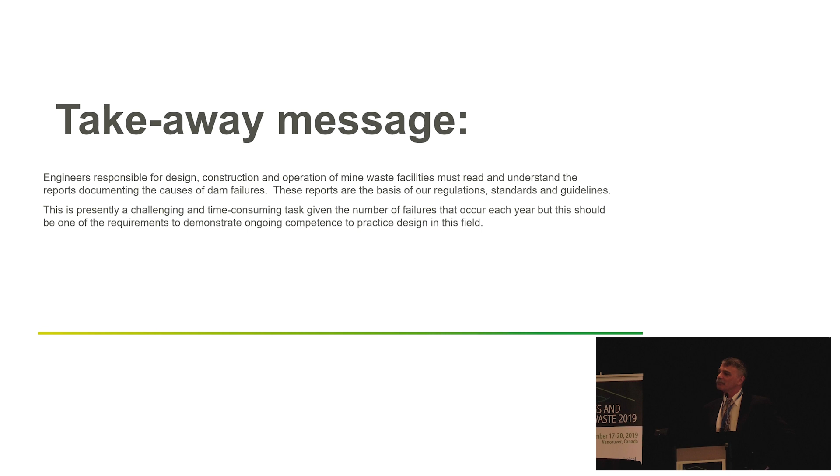And so the takeaway message, you can stop listening to this after this, is read. There's all these tremendous reports that we have available that you can learn from. They explain how these failures occurred, why these failures occurred, which are different answers. And personally, I believe that in order to be competent, to be able to practice in the field, we should have read these reports, we should have understood the reports, and we should be able to design our facilities to prevent the failures that are occurring.

We've got a draft standard on Friday, so I'm going to talk about requirement 13.4: identify and implement lessons from internal incident investigations and relevant external accident reports, paying particular attention to human and organizational factors. So this talk goes directly to that requirement in the global standard.

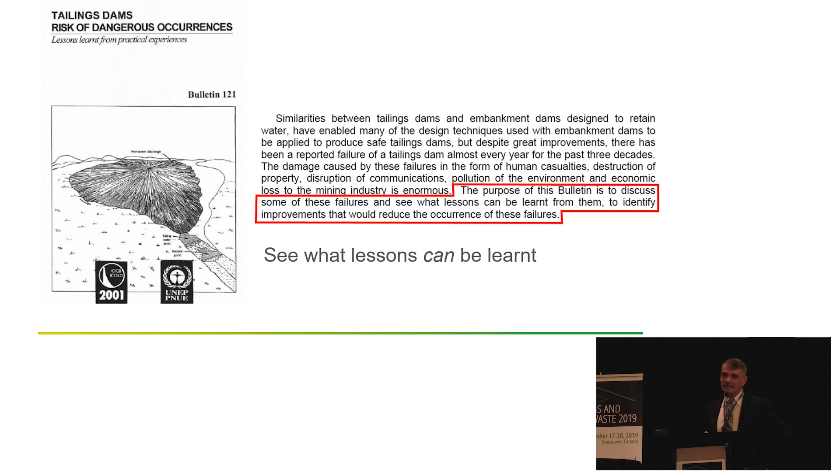This isn't something new that we're talking about. If we go back to the ICOLD Bulletin 121, published in 2001, there's a statement there, but the key is see what lessons can be learned. Even though this document was titled Lessons Learned, it's see what lessons can be learned, and you need to read these things to understand the lessons.

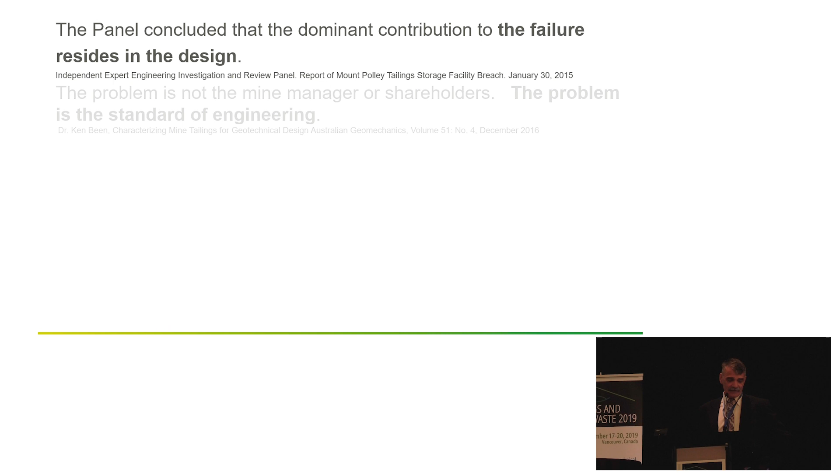And one of the things when you start reading consecutive failure reports, you come up with a disturbing and recurring theme. It's that the failure resides in the design, the problem is the standard of the engineering, inherent vulnerabilities in the spillway designs, deficiencies in the engineering practice. Those are things we engineers can address. We can't address some societal issues, but we can improve the quality of our engineering.

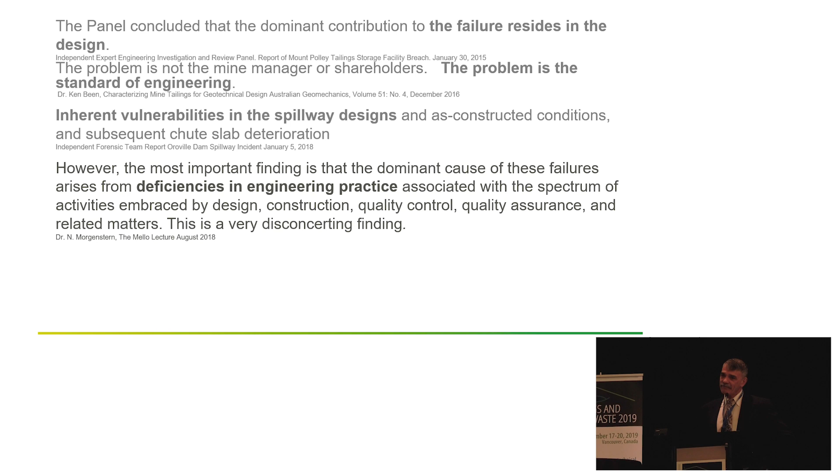Failures are continuing to occur. I think it's because we have better reporting that we're seeing a higher failure rate. It's not that more dams are failing, it's just that we now know the number of dams that are failing. So we can no longer hide. The failures are out there, everybody's talking about them, we need to do something about them.

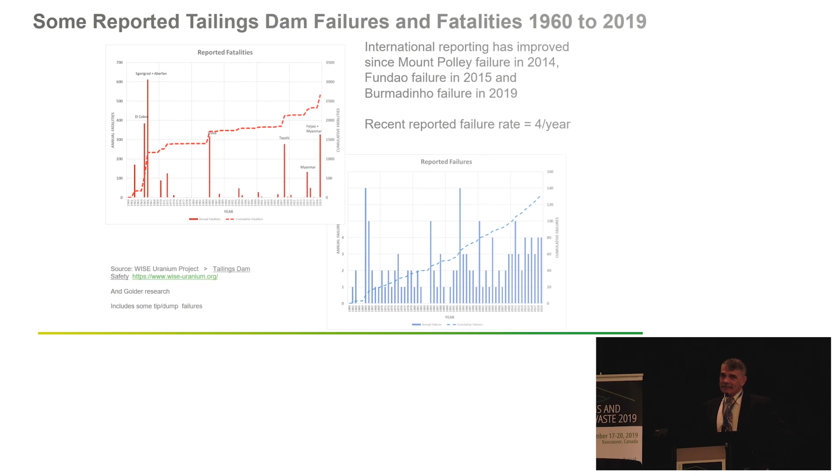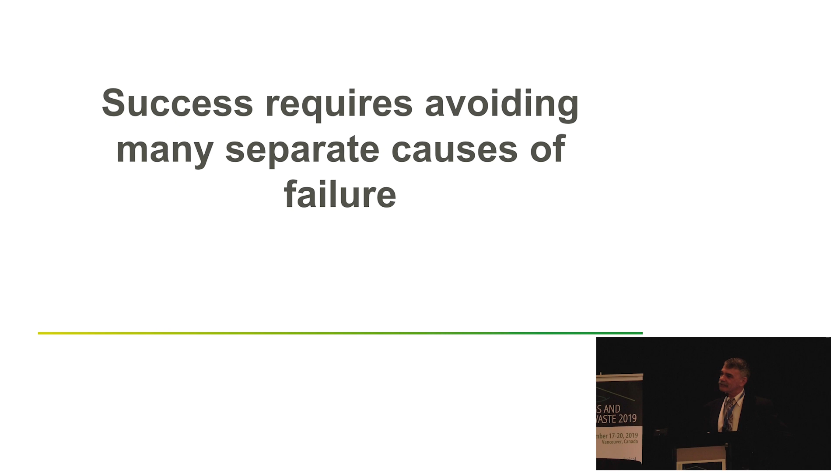And this saying, you know, I was reading a book on evolutionary biology. It's the success of species. So success requires avoiding many separate causes of failure. We're engineers, we have to identify each and every possible cause of failure for our tailings dams and provide design controls, multiple design controls for each of those failures if we're going to succeed. If we miss one, we have a failure, but we have to catch them all.

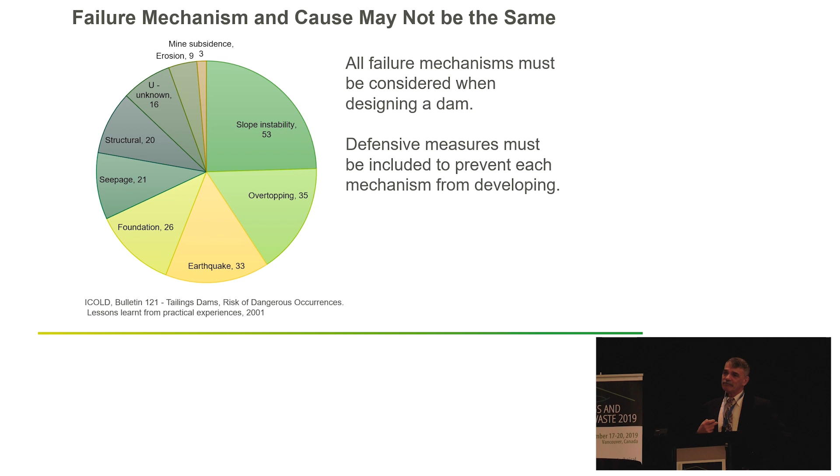And failure mechanisms and causes are not the same thing. This is ICOLD Bulletin 121. It's the statistics what people like to play with, the causes, the mechanisms of failure. And so I'm a geotechnical engineer, I have to provide a defensive mechanism for each and every one of those failure mechanisms.

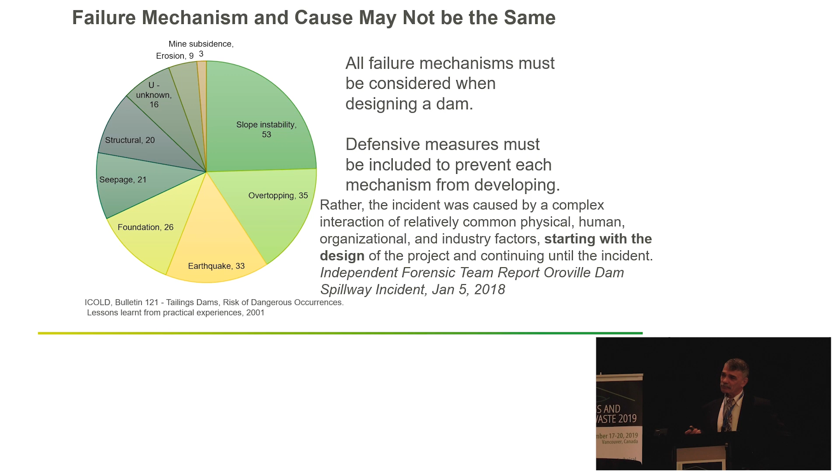However, when you read some of these reports, the incident was caused by a complex interaction of relatively common physical, human, organizational, industry factors, starting with the design. So we, the engineers, have to understand what all those complex factors are so that our design accommodates those. So we don't just have to accommodate the physics of the problem, we have to accommodate the cultural issues related to the specific problem that we're dealing with.

A good friend of mine, J.T. Thomas, was a driller. We'd be standing out in the mud and he'd say, good judgment comes from bad experience, so you should be happy you're having this experience because you'll get better judgment. If we reforecast that for tailings engineers, good engineering judgment comes from understanding the lessons available from existing bad experience. You don't want your own bad experience, you should learn from the existing bad experience. So where do we find it?

The lessons to be learned are found in reports of forensic investigations and inquiries. I've put a couple questions down there you should be thinking about when reading these. What decisions would I, the engineer, make if faced with the same situation and information? This is where you really learn how to do decision making. And you have to avoid hindsight - knowing it failed, so not making that decision. Not knowing it failed, what would you do?

And another one for engineers of record - this is the important one. At what point would I, the engineer of record, stop operations at the facility so that investigations and design modifications could be carried out to rectify observed performance issues? That's the key one. If you're an engineer of record, you have to be prepared to do that. You have to be prepared to stand up and say, stop. You can no longer do this. We have to fix it.

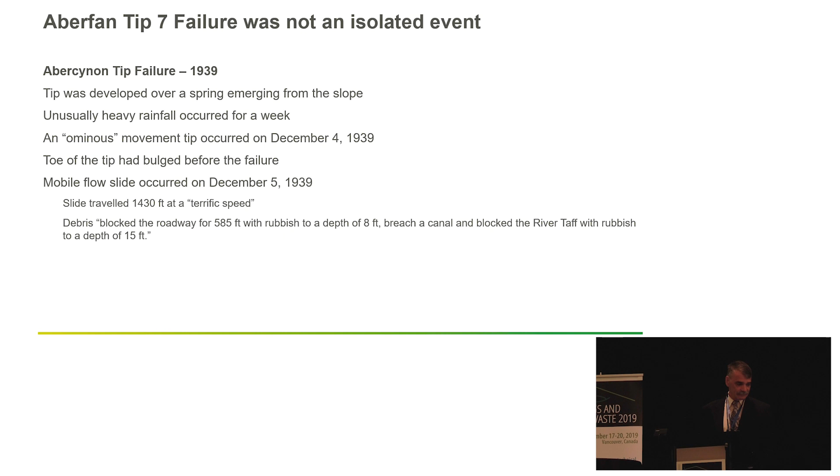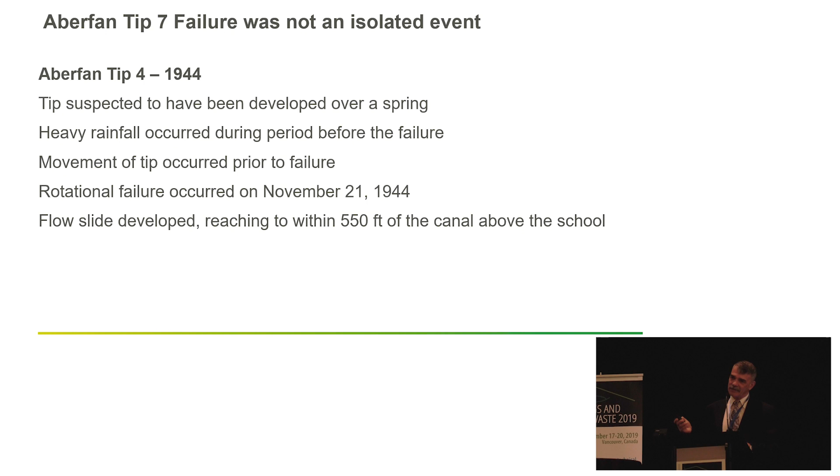In 1944, at the same site - not just an adjacent site, on this site - there was this flow slide failure. Different tip, same site. You've got to be internalizing this, knowing this, and working forward on your designs to prevent these things. Now on the same tip, in 1963, they had a failure - a mobile flow slide resulting from it, stopping just above the school. That was the site of the 144 fatalities.

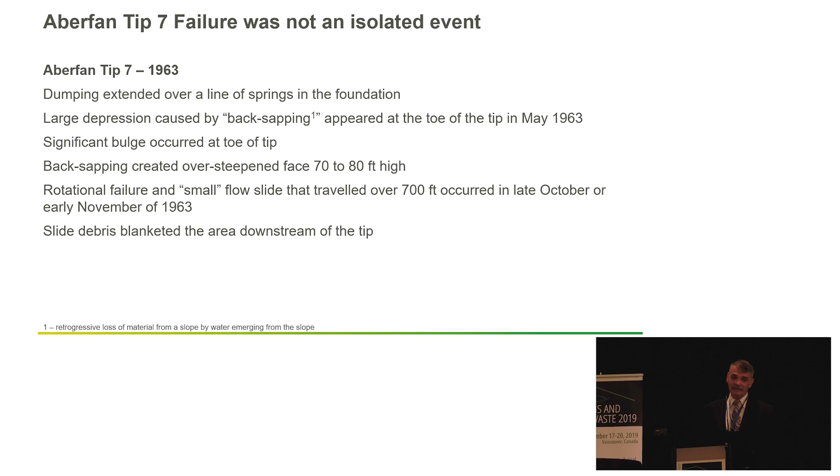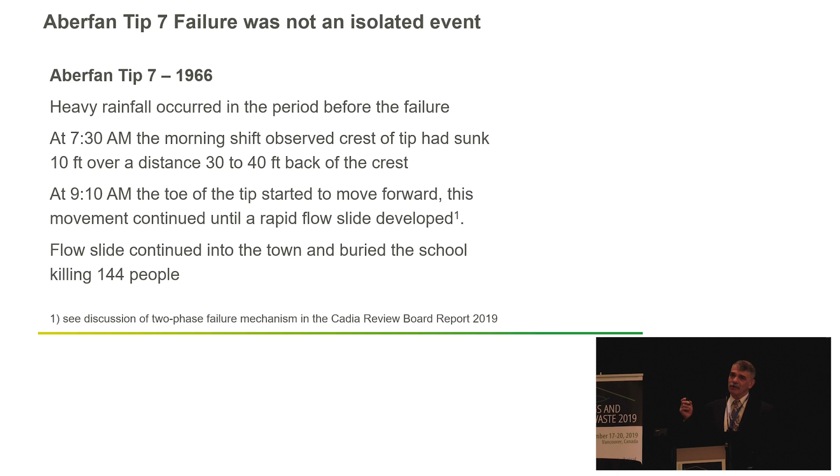So we were accumulating this experience and nobody's listening. Then we have the event in 1966 that resulted in all the fatalities. All that happened was it ran a little further than the previous four incidents that had occurred. So we need to learn from these type of things. Very good report to read.

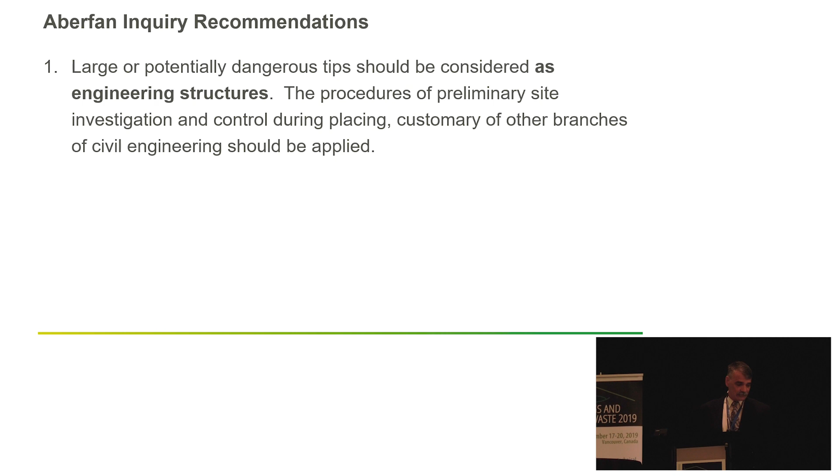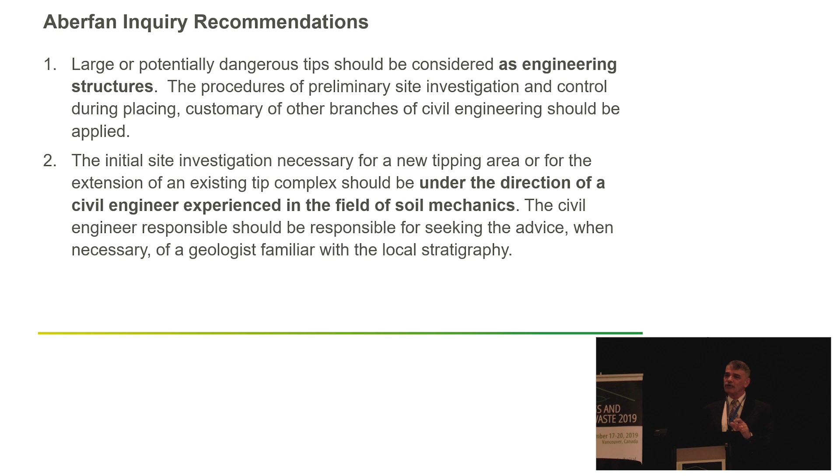So some of the recommendations - I'm going to repeat these later - you should consider the structures we're building as engineering structures. You should use civil engineering principles. You should have a civil engineer experienced in soil mechanics. He should talk to the geologist. You should use qualified, competent engineers. You should have an inspection periodically by an independent and qualified engineer, and he should do that on an annual basis.

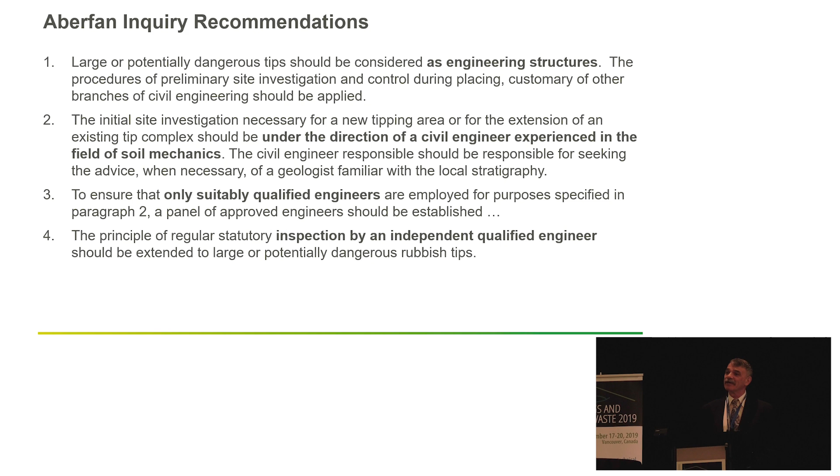This is 1967 that we're getting this set of recommendations, and if you read later ones, they're the same. So what have we learned as an industry? The standards which should be called for in large tips adjacent to inhabited properties should be set, and we have to decide if we want lower standards for sites with lower consequences. The definition of a large or potentially dangerous tip for statutory purposes - that sounds like CDA dam classification, dam consequence classifications.

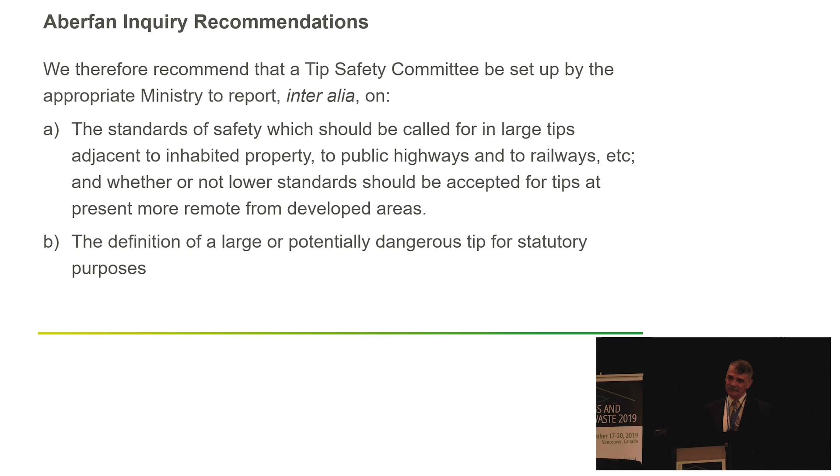Aberfan sent a message to the geotechnical and mining industries about the importance of collecting data on and learning from previous events. The message remains current. That's the 1967 statement - the message remains current, and in 2019 it's the same message. They highlighted the need for proper understanding of the hydrology and hydrogeology of tip sites, and of the materials upon which the tip is constructed, as well as proper management of the tips themselves. So over 50 years ago we're being told certain things, and we need to learn these.

So let's just jump ahead. There's a whole set of failures that occurred between 1966 and 2014. I tried to compile a lot of those, but it doesn't fit into a talk of this length. So, a tailings dam failure with no fatalities - still a wake-up call for the industry, though.

Here's a report, so you can go and get it. The key is there are a lot of appendices, and when you read the reports, you need to read the appendices, because a lot of what you'll learn is in your interpretation of the information provided there.

So there's the independent expert engineering panel report, then the Chief Inspector of Mines put out his report, with an appendix being the Klohn Crippen Berger report on the assessment of failure mechanism. So you've got multiple reports to read and understand the Mount Polley situation.

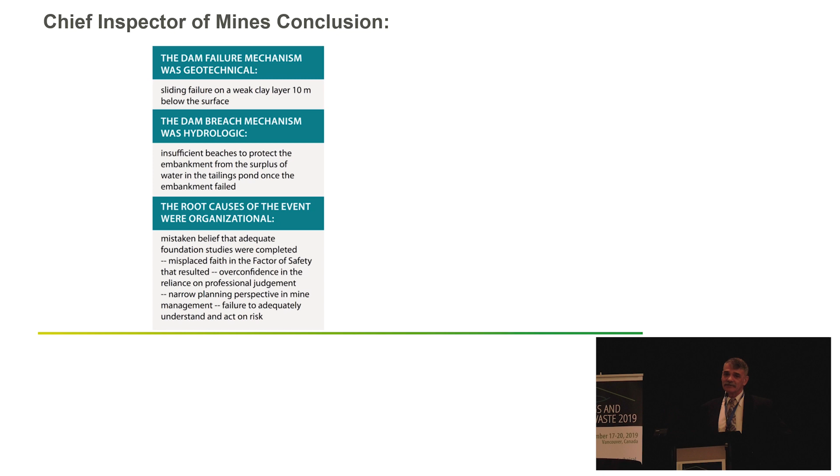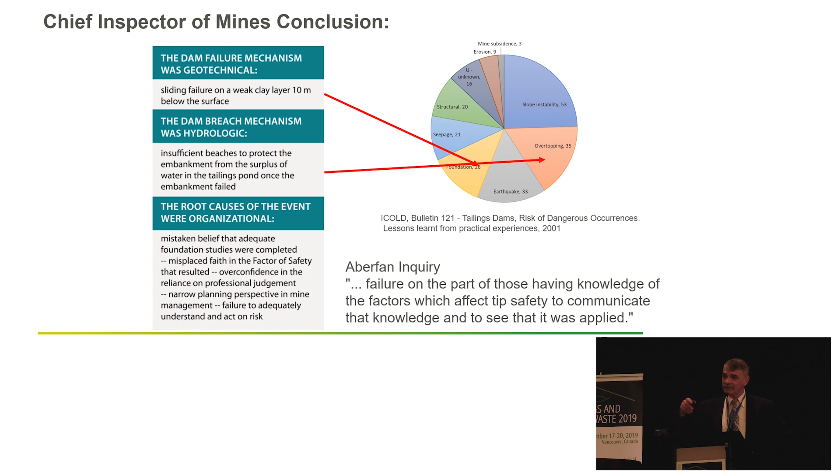So if we look at ICOLD and see where this falls, the failure mechanism was foundation, and overtopping was the breach mechanism. But if you read that last box, related to the Aberfan inquiry, it says: failure on the part of those having knowledge of the factors which affect tip safety to communicate that knowledge and see that it was applied. So there's a direct correlation from 1966 to 2014.

Some other conclusions of the report panel: the panel concluded that the dominant contribution to the failure resides in the design. There are other pieces, but basically that's the key — we have to work on the design if we're going to improve the performance of our structures. I'm an engineer, I can affect design. I'm an engineer, I can't affect society. So I'm focusing on the design part, I'm talking to the engineers.

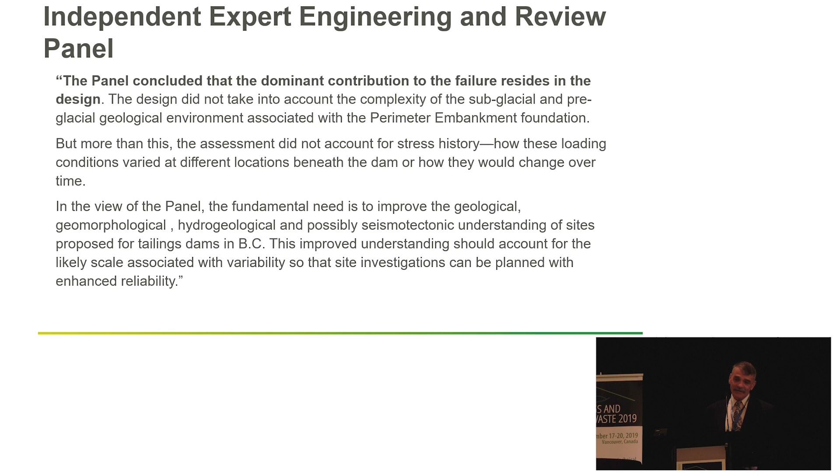So you have to go back, get Ralph Peck's paper from 1969, and read it. There are 8 short things you need to do to properly incorporate the observational method, and one of those is to decide that it's appropriate, because there are many exclusions to using it properly.

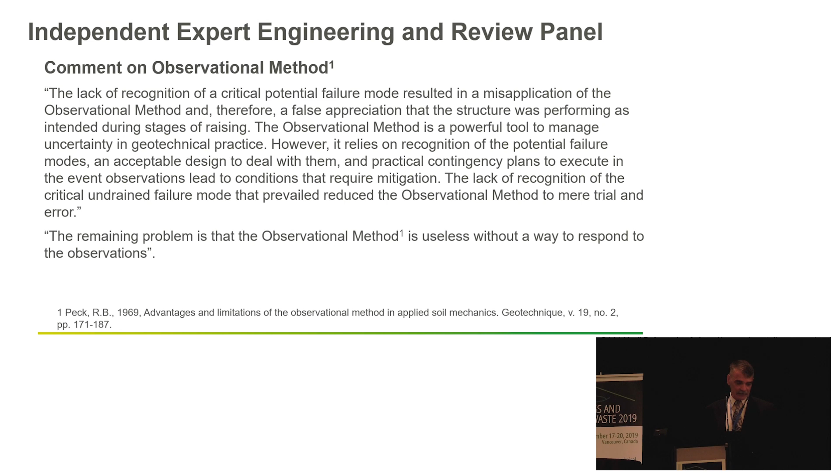From that same report, review boards — so review boards are what's going to prevent the tailings dams from falling down. Well, it's part of best practice, that's all we're saying, it's part of best practice. But if you read to the end of it, they should not be necessary for all tailings undertakings. So the industry has to decide where they can best apply the very short pool of independent reviewers.

To reduce the consequences for the tailings industry, all facilities don't need the panels that you've been talking about and listening to on their projects. There's just not enough — you know, if we needed $3 billion worth of engineer of record work, and if you have 3 people on a panel and you do the multiplication, it's a bigger number.

Within BC, in the mining code, it says the Independent Tailings Review Board provides non-binding advice and recommendations, but does not direct the work or perform the role of the engineer of record. The review board can't take over the design. The authority for design has to be vested with the engineer, and the responsibility for operation has to remain with the owner. So it's very important to understand that when you're looking at what you expect to come out from a review board.

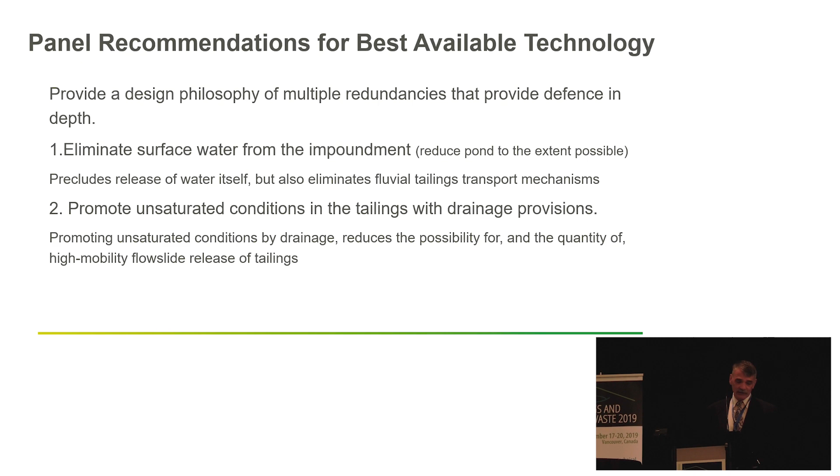They had what at the time were thought to be controversial recommendations for best available technology. Really, if you look at it, it's design philosophy to provide redundant controls on the failure mechanisms — that's what they were saying. Number 1, eliminate surface water from the impoundment, or reduce it as much as practical, to reduce the consequence of failure. Promote unsaturated conditions in tailings with drainage provisions, and achieve dilatant conditions throughout the tailings deposit by compaction. Very simple.

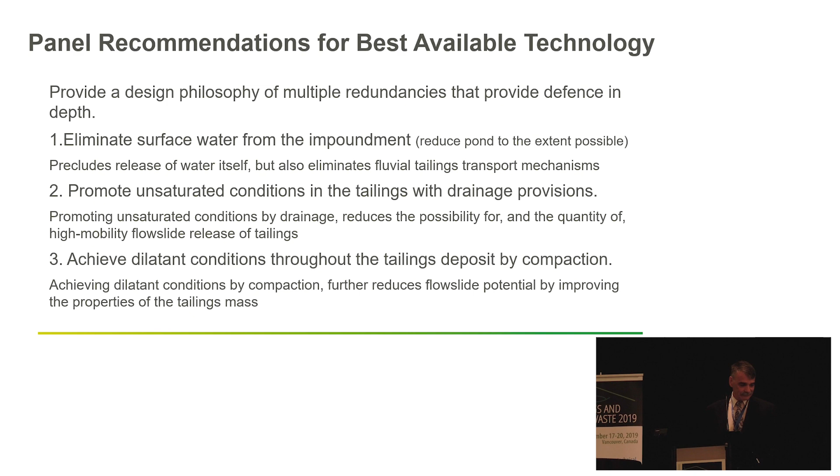You look at what they're really telling you to do and you can incorporate it on many facilities. However, it's not new, providing unsaturated conditions.

Tailings Bulletin 97, ICOLD, published in 1994, goes straight to the core of how do we successfully implement drainage. If you look at it, it says upstream dams no longer need to be regarded as a type that traditionally has a low factor of safety if you implement drainage. So you can go and grab this document and read about what people were thinking about in 1994.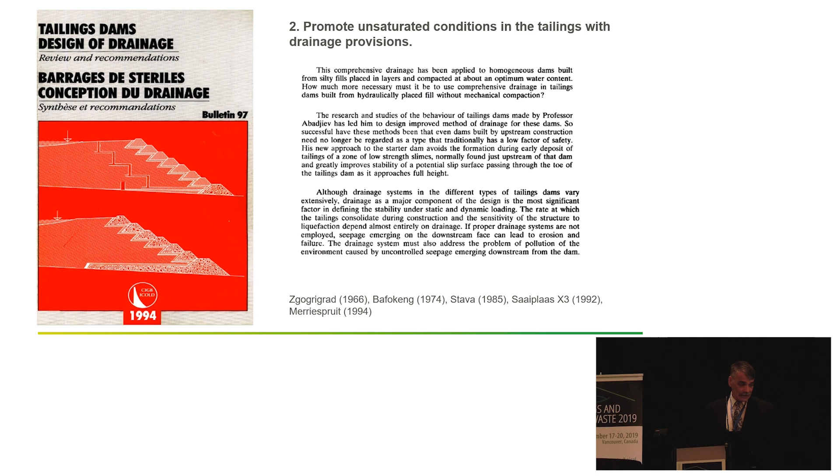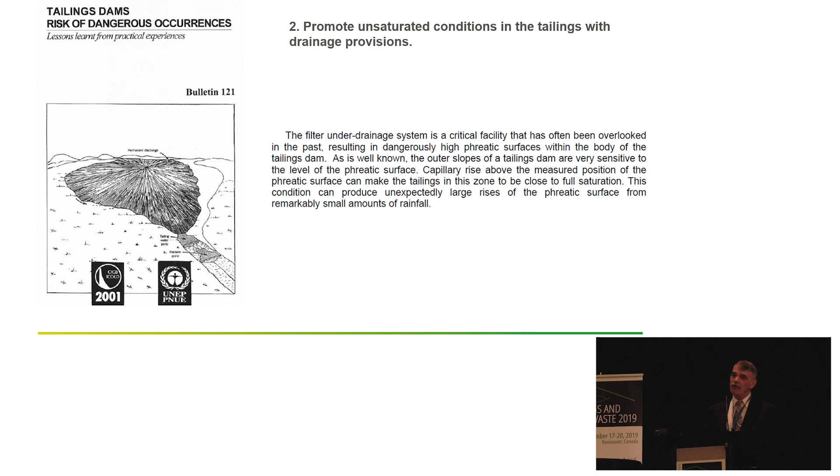To improve the stability of upstream constructed tailings dams, ICOLD Bulletin 121 promotes unsaturated conditions. The filter and underdrainage system is a critical facility that has been overlooked in the past. So we're getting multiple times that we could have learned this lesson. It's about time we did.

Aberfan to Mount Polley, what changed? Here are the recommendations following Aberfan. Just threw them up there again, those five. First one, design under direction of the engineer of record.

That's coming out of Mount Polley. Operation under direction of a tailings qualified person. So you have to have people who understand the structures you're using.

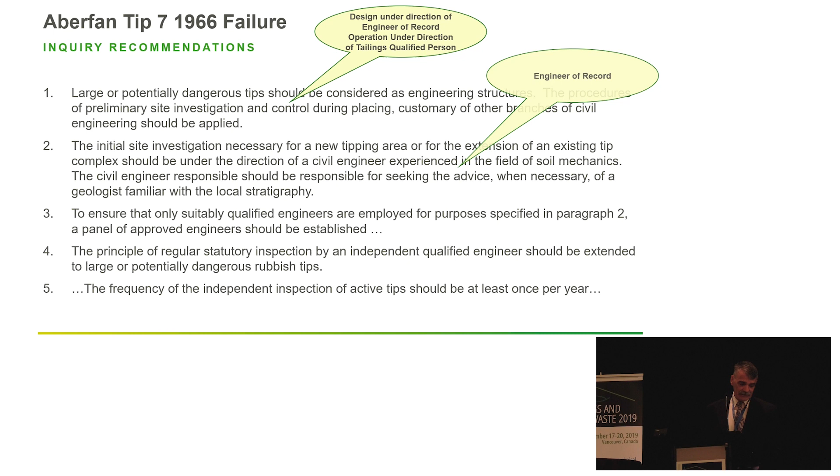Direction of a civil engineer, that's the engineer of record. He has to talk to geologists, that's BC's foundation characterization guideline. Qualified engineers, chief inspector of mines recommended competency, professional reliance standards.

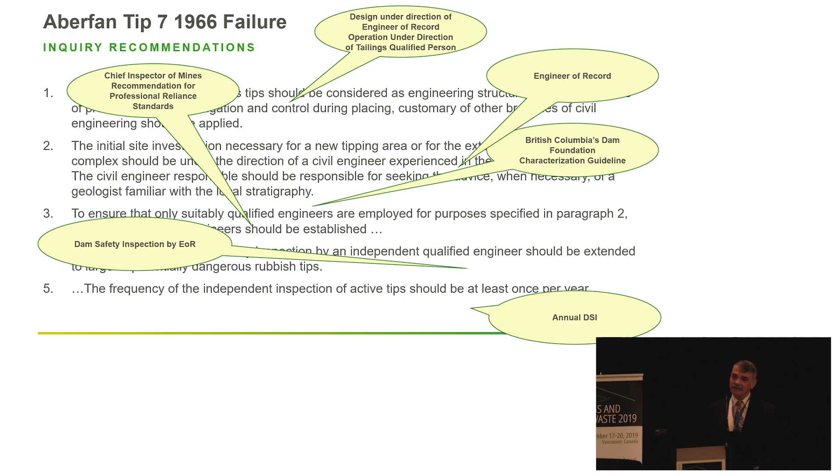Dam safety inspections by the engineer of record on an annual basis, same thing, just different words. We go on to the next recommendations.

You have to have standards. Here we have the Canadian Dam Association Dam Safety Guidelines, and then we have the consequence classification. So you can see that we haven't really moved forward from 1966 to 2014. We've implemented some of the things, but we're still having dam failures.

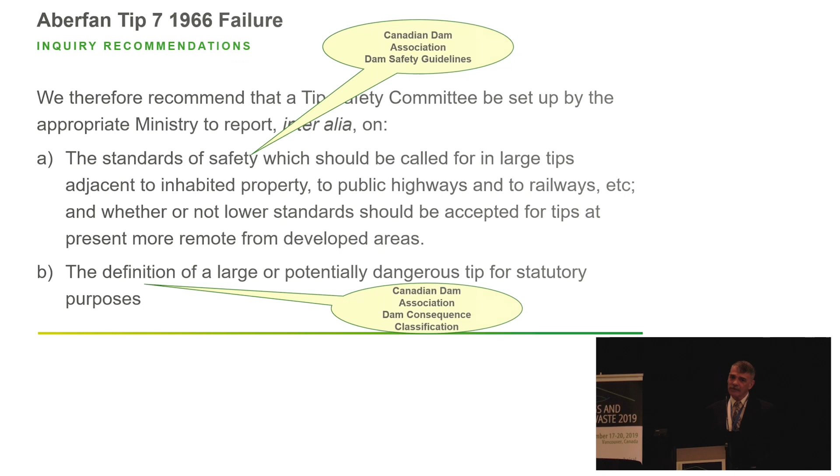We get to 2015, Mount Polley. Questions to contemplate when you're working through the report and all the appendices: what decisions would I, the engineer, make if faced with the same evolving situation and information?

It's not like this dam was performing perfectly and then it failed. At what point would I recommend stopping use of this facility to investigate decisions and develop a plan for remediation and return to operation?

There's a report, and the best part of the information is in the appendices. You have to read those appendices. It takes more than a weekend, but it's well worth doing.

Additional reading: you need to go and get Steve Vick's paper, GeoRisk 2017, 'From Deviance to Diligence.' It's really a good paper to read. It talks about engineering structures, it talks about NASA, it talks about some of the organizational issues that lead to failures of tailings facilities. Good paper, so that's a paired reading assignment.

So this is my interpretation, a design concept based on the successful operation of the Germano Dam. Starter dam with a basal drain, slimes contained behind an upstream raised dam constructed of sand tailings to be fully drained, fines elevation below the sand so that you get no slimes within your sand, runoff from the upstream catchment diverted around the structure and under through the culverts. So they're using some of the best practices or technologies that were stated from Mount Polley.

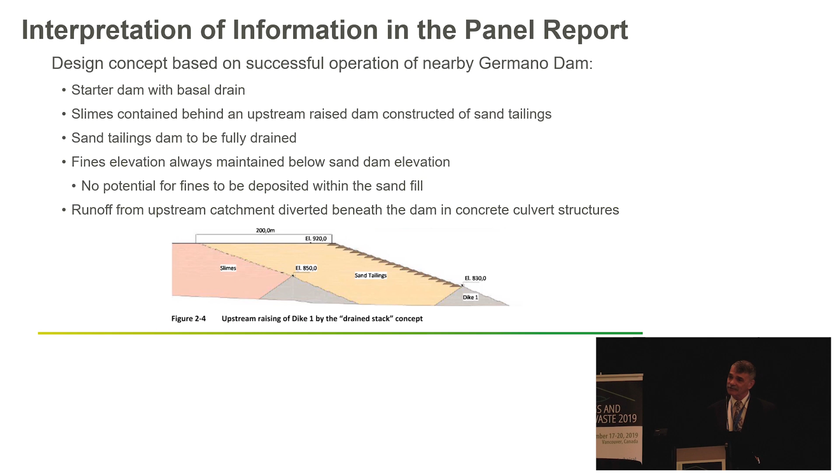Draft Global Tailing Standard, requirement 7.5. The change management systems also include the requirement for a periodic deviance accountability report. I think this is a really big step forward. We put these in our as-built reports, but this is taking it out into a separate document that says...

From when I started design in 1998 to today in 2019, this is how the design's changed, and this is how I've accommodated all the different issues. So I think this will be a really good step forward.

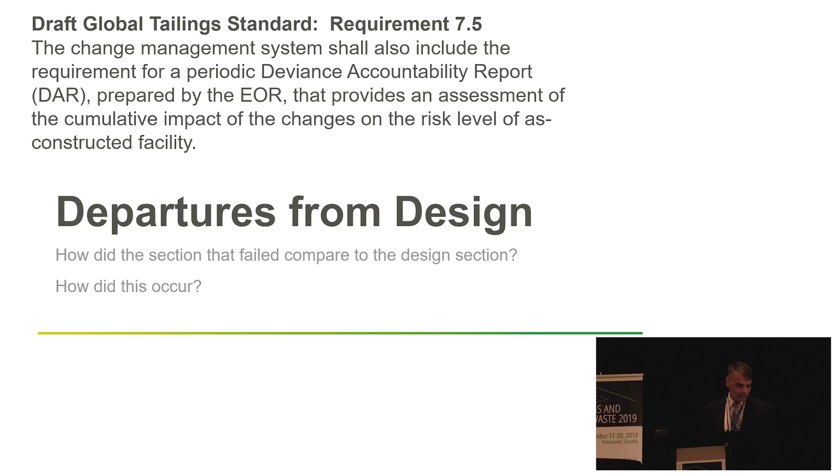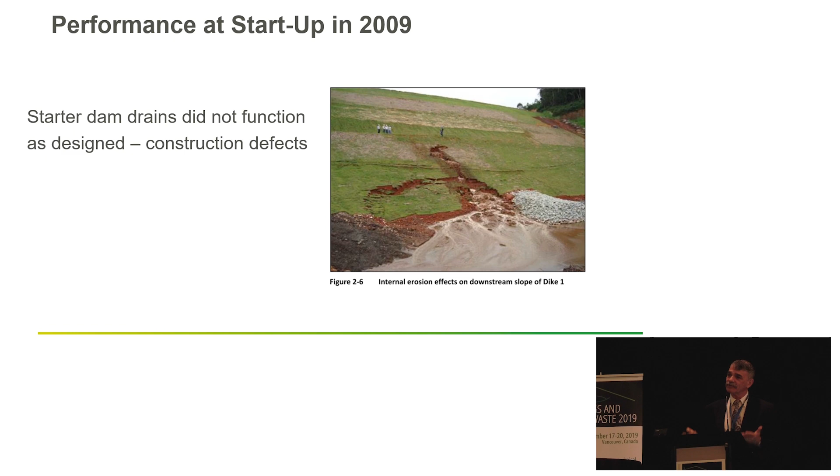So how did the section that failed compare to the design section, and how did this occur? Very quickly: performance at startup, they had some construction issues and the filters didn't work, so they had to change things. They lifted the drainage system up to the top of the starter dam and continued to work. Then they got some sinkholes from the concrete decant structure due to construction flaws.

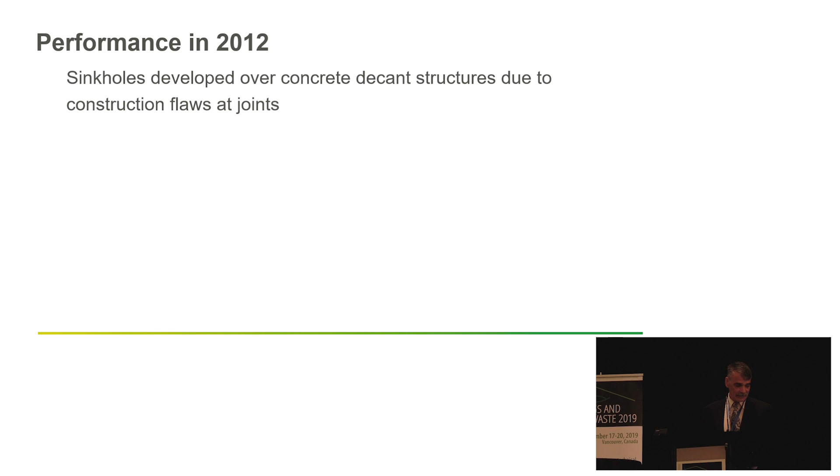So they adjusted the geometry of the dam, pushed the crest back, and it sits now in the slimes area. They had a beach criteria which they didn't respect all the time, so at times slimes were encroaching into areas it shouldn't.

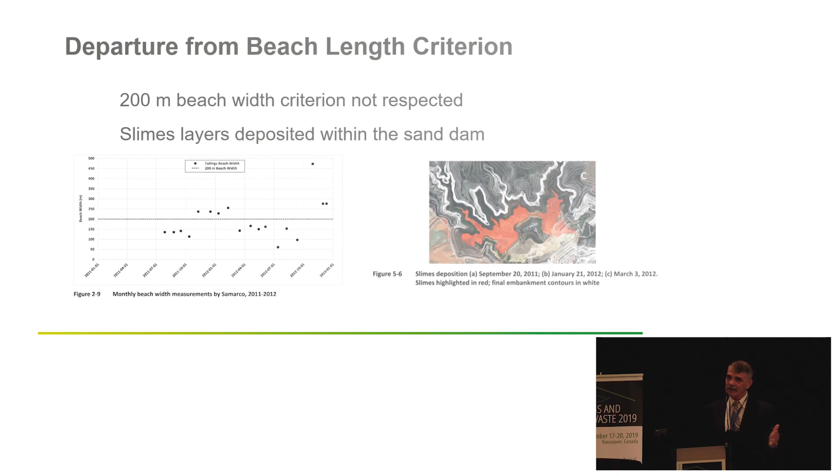In 2013, you're getting cracking, a high phreatic surface, high on the dam. So they improved drainage, put in a local filter and a buttress to fix that.

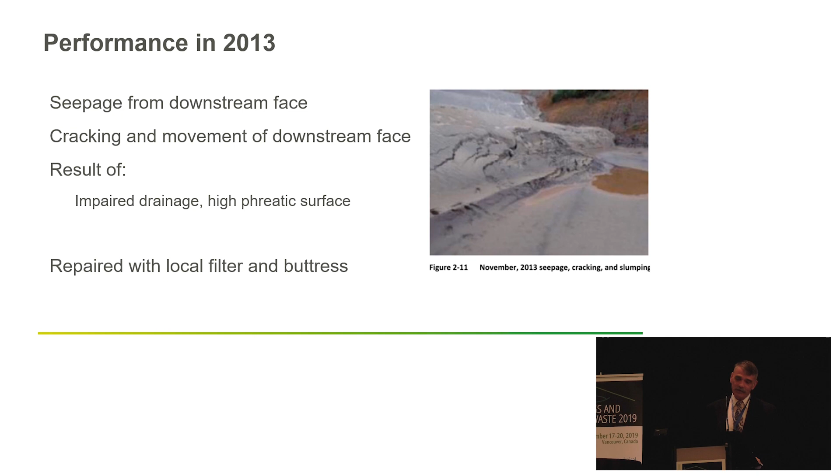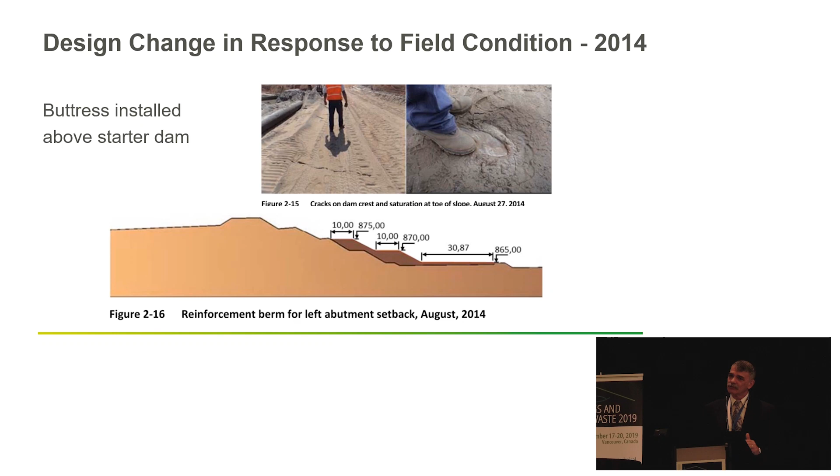In 2014, it migrated up the dam, so we fixed the 2013 issue, it's higher, put another buttress on, and then we had the failure. So you see an evolving sequence of events, and you have to ask yourself, where would I intercede? That's the real learning from this one, is where do I intercede as the engineer of record?

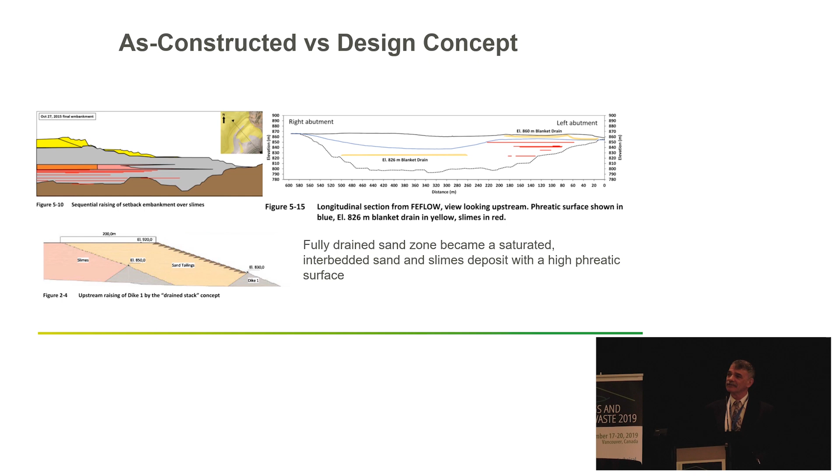So you go from the as-constructed to the design concept. You have a fully drained, unsaturated situation versus a structure that has a high phreatic surface and slimes within the structure itself that resulted in the extrusion mechanism.

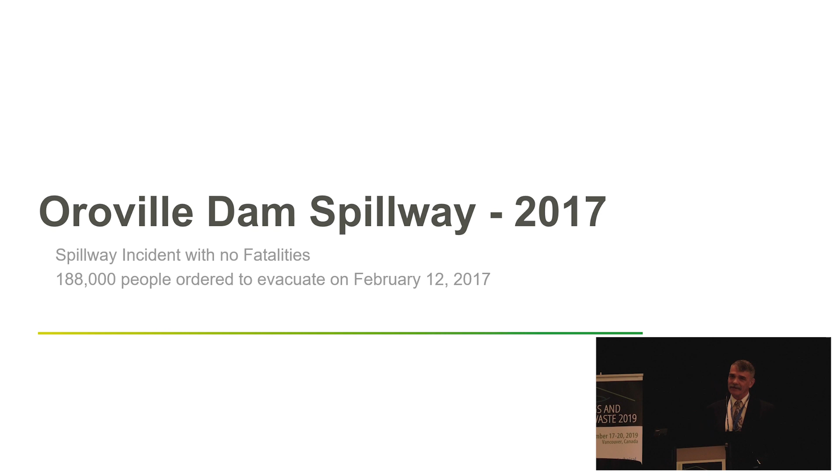This is not in our industry, something that happened that doesn't relate to us directly. However, it's really instructional to read this report on the Oroville Dam spillway incident in 2017. No fatalities, but 188,000 people were evacuated on February 12, 2017. There's a marvelous report to read that goes really into the organizational issues we need to understand.

Team comments coming out of the forensic report: the spillway was vulnerable by design. Why are we doing things like that, making things vulnerable? They should be robust by design, resilient by design, not vulnerable by design.

So why was that? Lack of internal design direction and review, and an inexperienced principal spillway designer. This is you young grads, people with 1 and 2 years of experience being assigned to do designs of significant structures without oversight. So somebody was hired, well-educated, but lacking experience.

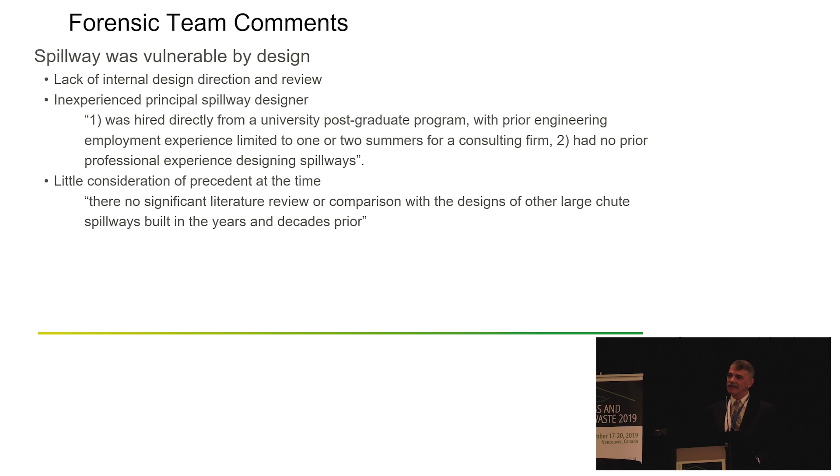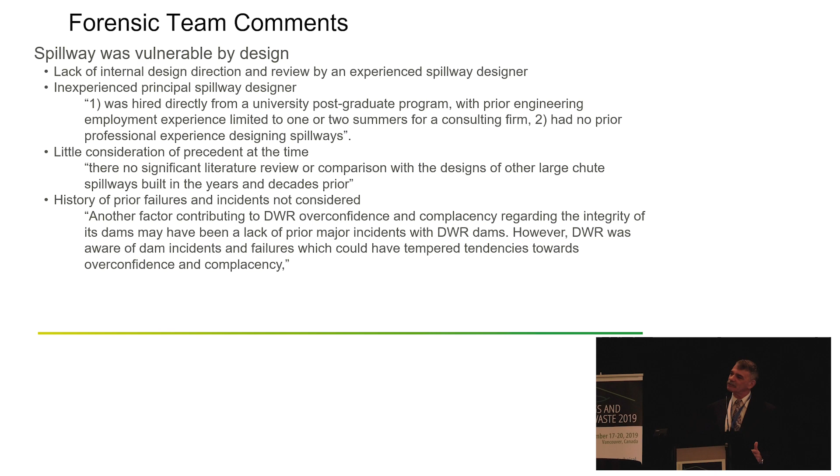Little consideration of precedent. They didn't go back and look at the causes of spillway failures at the time. History of prior failures were not considered. So they looked internally and said, we've never had a spillway fail in our dams, therefore spillway failures will not happen, as opposed to saying the industry's had hundreds of spillway incidents. Let's go and learn from those so we don't make the mistake somebody else did.

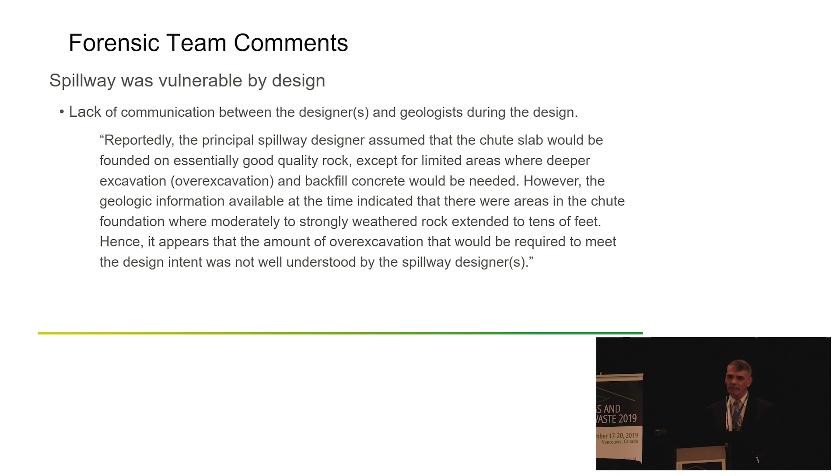There was a lack of communication between the spillway designer and the geologist during the design. Recurrent theme: I'm a geotechnical engineer, I'm going to do the geotechnics, I don't need to talk to anybody else because I know what I'm doing. I was taught soil mechanics, and that's soil, so what more do I need to know?

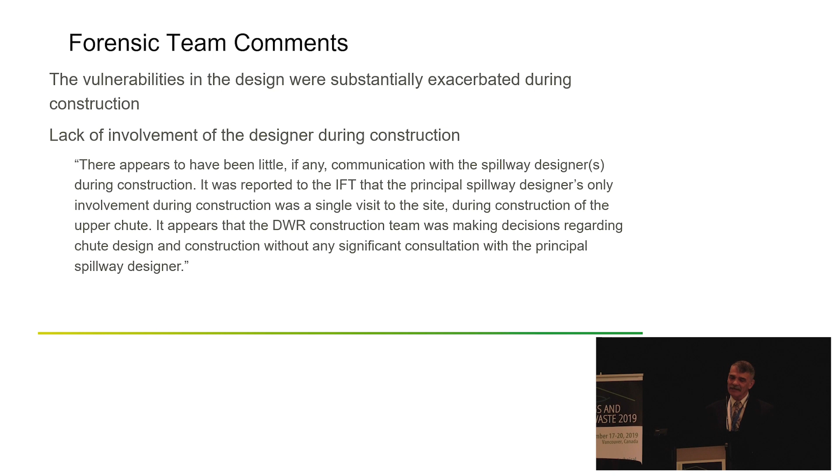Vulnerabilities in the design were substantially exacerbated during construction. That's directly out of the report. Why? Lack of designer input during construction. This is really a common problem we have: I've designed something, they've taken it and they're building it in the field, they don't talk to me, they don't understand the assumptions I've made in the design, what I've assumed the conditions will be. They open up the foundation, it's different. They may not change the design to accommodate it, or they may change it inappropriately.

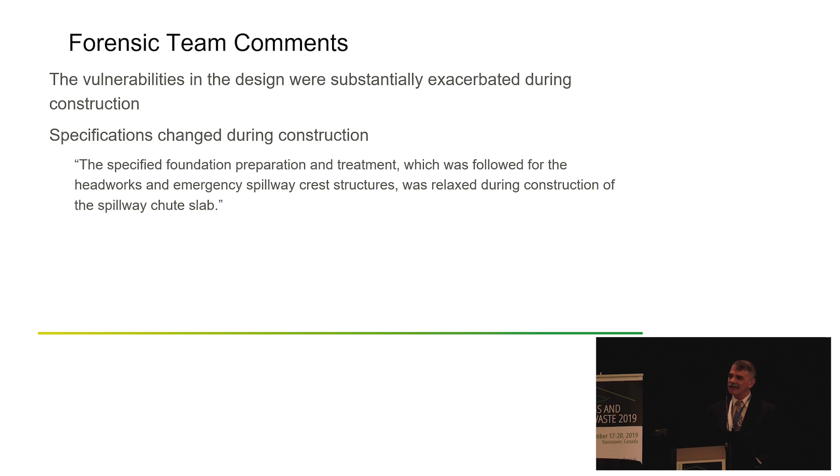Specifications change during construction. How many times have you been in the field and you put pressure on because of time, budget? We need to optimize the construction, which is the code word for reduce the costs, so that we can get our bonuses. So we need you, the engineer, to relax the specification.

A risk assessment is not just doing a PFMA. That's only a component of it, and we need to go to risk assessment professionals to get assistance, same as you need to go to a geologist for geology, and a hydrogeologist for hydrogeology.

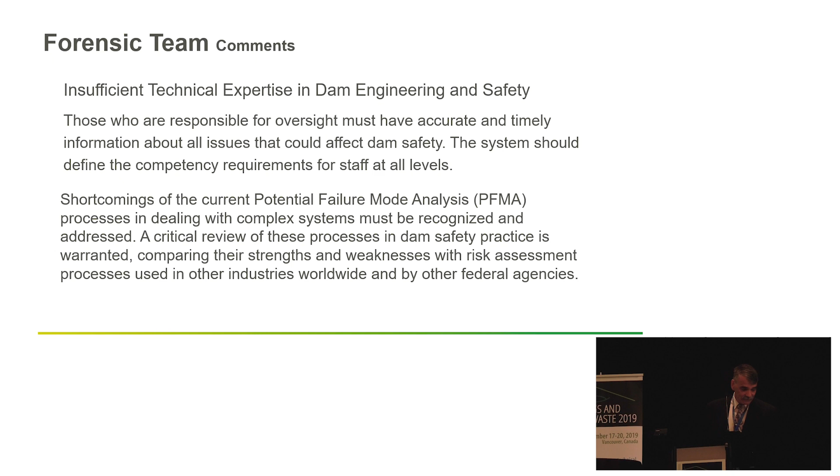Insufficient technical expertise in dam engineering and safety. Engineers assigned to address the safety of dams and appurtenances must not only be familiar with these dam safety organizations, but must keep up with the current state of practice in dam engineering. You must go out and read, and part of that reading must be the forensic investigations of the failures.

Insufficient priority on dam safety. There was no one in a position of authority specifically tasked with ensuring the balance is right. So why does the mining industry have an accountable executive? It's the one individual who's responsible for that. And how did that come out? Well, when we see they don't have that, we have incidents and failures. So our regulations, guidelines, and standards are a response to the behaviors of the structures that we're designing.

The fact that this incident happened to the owner of the tallest dam in the United States, under regulation of a federal agency, with repeated evaluation by reputable outside consultants, in a state with a leading dam safety regulatory program, is a wake-up call for everyone involved in dam safety. I think we need to reforecast that for the mining industry. This is only the most recent wake-up call related to the failures of our tailings dams. When you read the histories, at the end of every one of these forensic reports, it's a wake-up call. Well, let's wake up and listen, guys.

2018, so Cadia Valley. Embankment slump. It was a mobile slump. It wasn't a failure, with no fatalities.

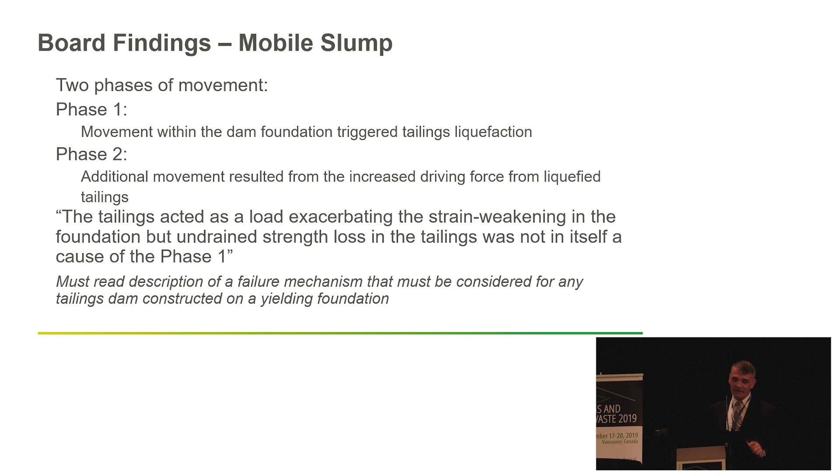Other findings: there was a complex geologic setting, an undetected unit within the foundation. Sometimes we miss things, sometimes geologists miss things. The tailings were generally saturated as a result of the design. Well, why was that? Why didn't we respect the 1994 drainage for tailings dams documented from ICOLD?

The surveillance data was indicating that there was movement occurring in the dam, but the movements in the area of failure were larger than in other areas. And that should have triggered somebody to go, it's performing differently, the foundation is probably different, I wonder why. Let's go and take a look. So my comment is, when do you trigger reinterpretation of geology?

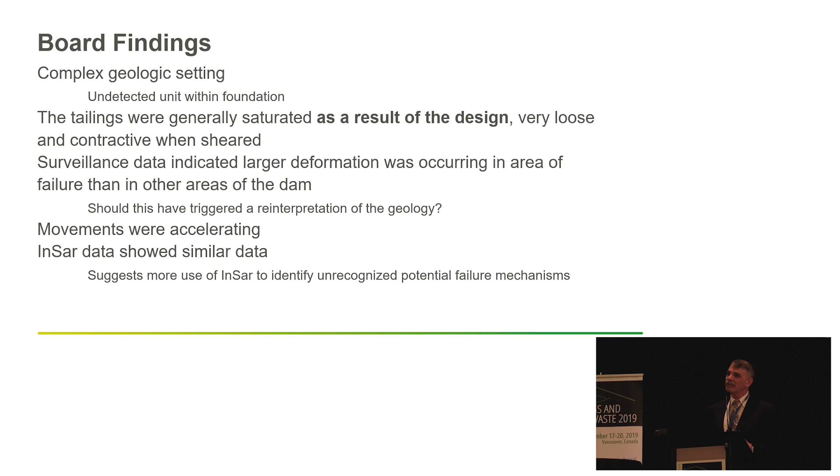They also commented that the movements were accelerating, but INSAR, in hindsight, identified the same zone of movement. On another project recently, INSAR has told us that the zone of movement is much larger than we thought it was. So I see the use of INSAR not as a surveillance tool, but as a mechanism to tell me, did I miss something? Is something happening that I didn't expect in my performance-based design?

In summary, the learnings from the back analysis of the failure indicate that the following factors need to be considered in the safety level of the remainder of the embankment. So you go back to Mount Polley and you can look at those three things that we wanted to do: limited drainage within the body of the TSF and a high phreatic surface, and storage of a large body of saturated liquefiable tailings behind the starter embankment.

So that design could have been changed, and we would have had the foundation movements and the foundation failure, but no release of tailings. So the slump, the mobile slump, was triggered by a small foundation event. Mount Polley breach was triggered by a foundation failure. So the overtopping occurred because of the foundation failure. So a couple of mechanisms.

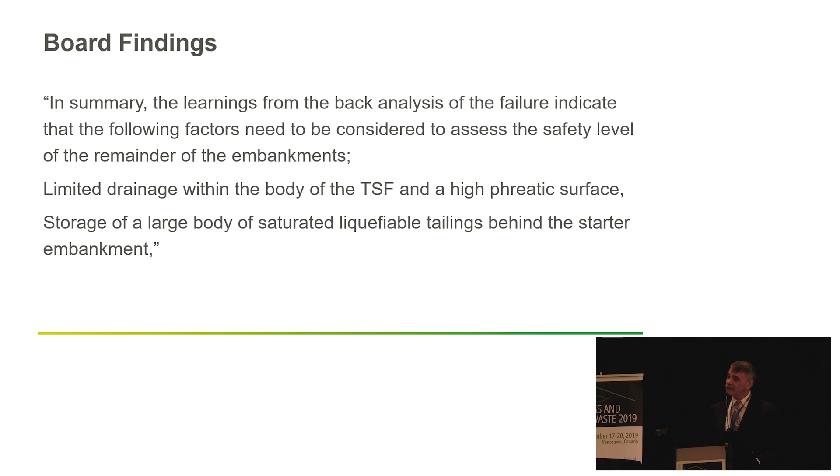You go back and look at Mount Polley, just flagging it there for you: promote unsaturated conditions in the tailings with drainage provisions.

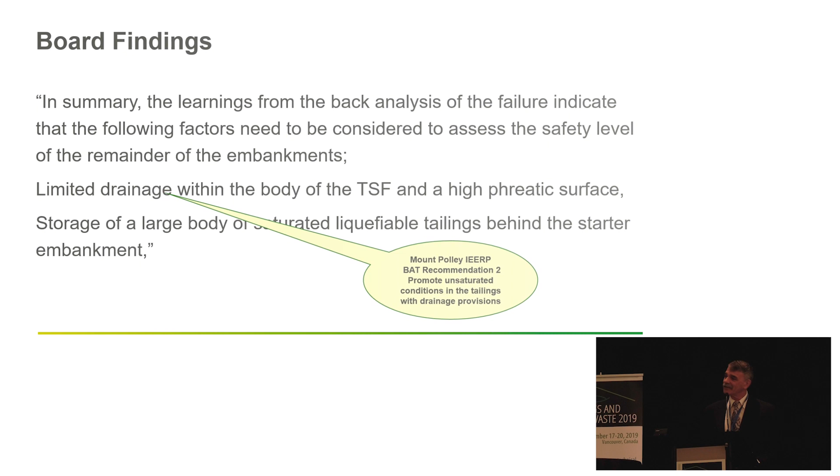Now we get to the current one. Can't say much about that because the report's not been issued. However, for me, the almost universal surprise at the rapidity of the failure, when I talk to people, surprises me. Why do we think that a liquefaction failure would be slow and develop slowly?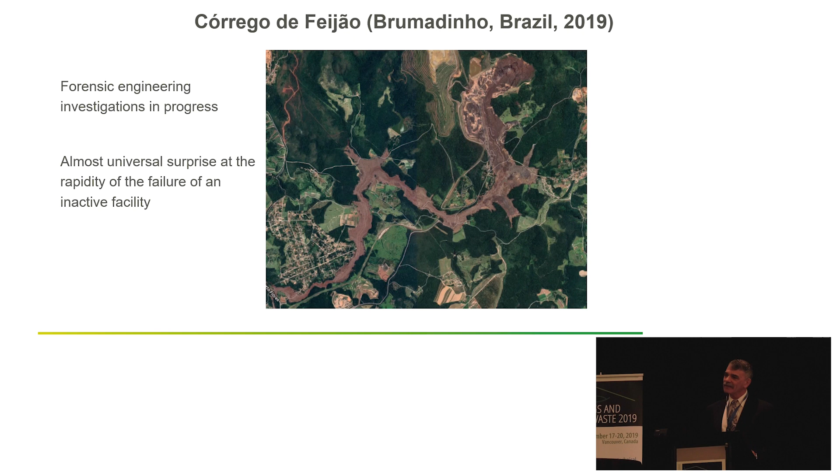We've read the case histories. Here's the case history: Geoffrey Blight's book, Geotechnical Engineering for Mine Waste Storage Facilities. I recommend you all buy and read it, because he's got a section in there, Failures of Mine Waste Storage Facilities. Simmergo, sometime in the 1990s.

I haven't been able to dig this one out yet. Gold tailing storage, 30 meters high, really steep outer slope, 40 degrees. Abandoned for 20 years. Phreatic surface measured at original ground surface. So the phreatic surface has dropped 30 meters over the period that it's been abandoned. So it's an unsaturated mass sitting on the ground.

It's reactivated for mine planning reasons. They started operating, the phreatic surface jumps up 20 meters in one month. They decide that's not good, we'll stabilize it, we'll put a bund around the dam. So they built a bund, they discharged wet tailings into the interface between the structure and the dam.

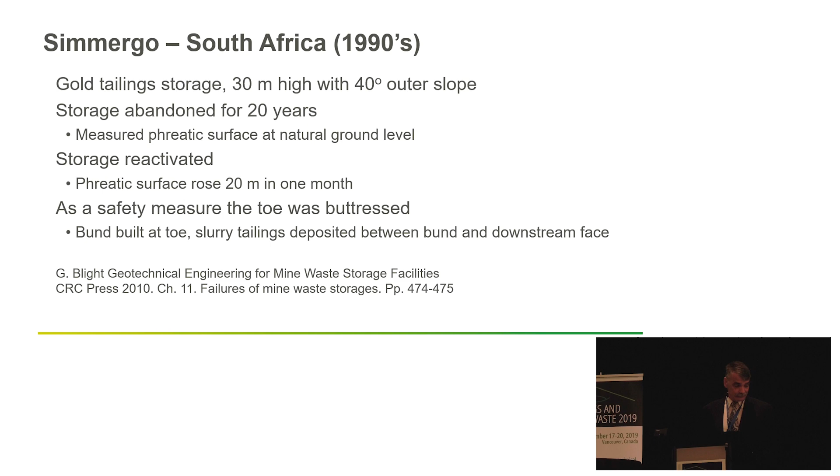And here's the quote: the Simmergo failure occurred at 10 a.m. on a Saturday when depositing was not in progress. So nothing happening, worker out there. A maintenance workman was standing on a section of the wall that failed. He was standing there totally unconcerned apparently. According to him, there was a tremor and loud rumbling. He clung to the tailings delivery pipe and was let down gently as this subsided into the gap. Fortunately, no one was injured.

So a small indicator for us as the industry that liquefaction occurs without notice and very, very rapidly. And it's in the history. We can find these things and we need to design against it.

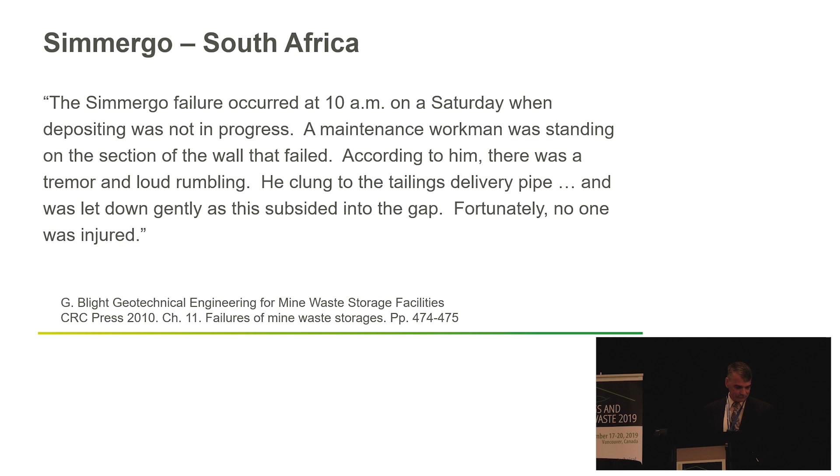A couple comments on performance-based design. This is where we're going, risk-informed performance-based design. We've now got a body of work in the public forum that we can use as engineers to benchmark our work for site investigations, for site characterization, for material characterization, and numerical modeling. Each of these forensic reports since Mount Polley has a very detailed discussion on each of those aspects. So we can sit down and say, okay, what are the best engineers in the world telling us to do and how to do it and how to think about these things.

One of the other things I got out of that is it takes 6 months to a year to put one of these reports together. You can do an incredible amount of investigation, design, modeling in a very short period of time if you're focused. So when people say this is going to take forever, the record says you can do it in a year. And how do I know? I read the record.

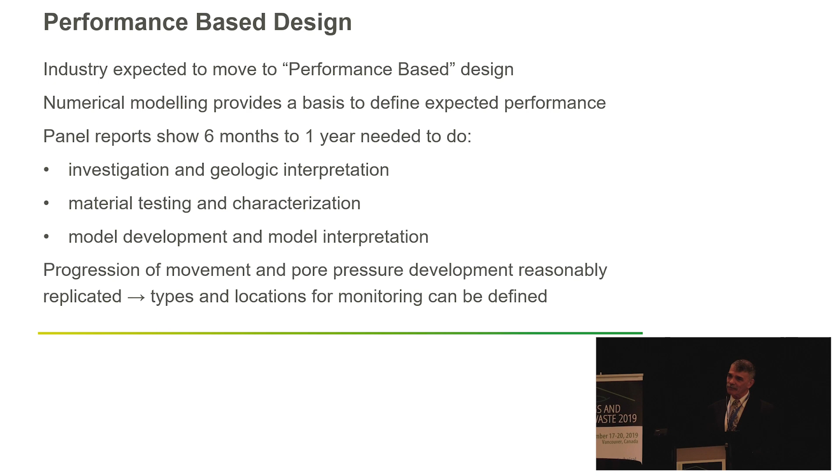Key to that is it allows us to be able to develop the models that tell us how our dams are going to perform. We look at how the dams are going to perform, and then we develop our surveillance network to accommodate the performance. At Cadia, the occurrence of excess pore pressure is a consequence, not a cause of the instability. So if you're surveilling your dam with piezometers, you miss this mechanism. At Mount Polley, as a result, the few piezometers and inclinometers were too far beyond the toe to produce critical data.

Even more fundamentally, the piezometers installed were only capable of measuring static conditions. They weren't able to give you an indicator that failure was imminent. It's only after the failure that you generate the pore pressures. So we have to look at what instruments we're putting in our dams, and are they surveilling the mechanism that we're worried about?

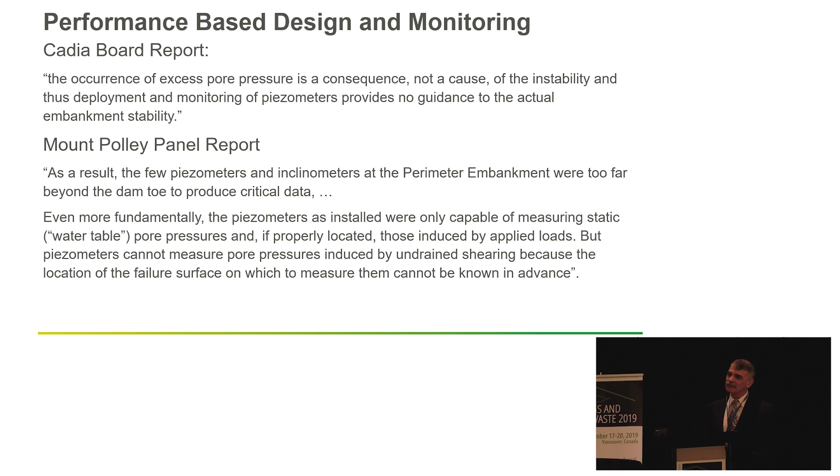And thank you. If there are any questions, I'm happy to take them.

Dirk was worried. Questions? He asked me to talk to a conference of 450 people for 45 minutes. Then he told me there are 800 people here, so I said I get 80 minutes, right? And then Terry spoke twice as fast. And so we really appreciate this, Terry.

This is great. Questions for Terry? It seems to me sort of your underlying theme is that we need to be proactive instead of reactive. Absolutely. And part of what you're pleading for is that part of our proactive stance has to do with truly understanding what happened.

Yes, and it's not the mechanism, it's the cause. We have to focus on the cause. The cause is complex, it's a lot of interactions. So I'm designing dams and I have a performance objective. I can achieve that, but if the operator doesn't understand why I've asked him to do something and he doesn't do it, that's a problem. If other changes occur, if the geology is not as interpreted, we have problems. So it's multifaceted, and we have to realize that.

It's not the finite element analysis which is the answer. That's only part of the design process. Understanding who I have to deal with is crucial. My designs in different jurisdictions are very, very different. If I don't trust, I provide redundancy and robustness. If I trust, then I'm optimized. So we have to be thinking that way. It's very, very important.